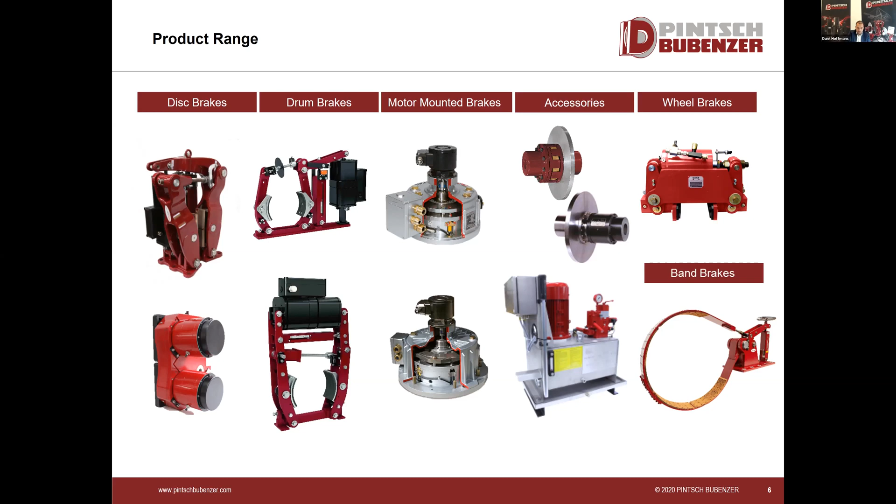Of course, we have the storm brakes, which are mounted on cranes to hook the cranes against heavy wind, to hold the cranes in position, also when they are loading or unloading. Then we have our monitoring systems on our brakes, so we can monitor each and everything on the brake, like wear, heat, speed - the complete condition of the brake itself.

Later on, we will present a little bit more about the thrusters. We have the BUEL thrusters, which is a very nice product, but Arno will present this in more detail. Then we have the rotary actuators, used mainly on spreaders, the flippers on the side of the spreaders to move them. Then we have the Cobra system, for a cable reel system to put the cable into the quay itself. And then we have hydraulic systems like the trim list and skew systems, which we supply to several crane manufacturers around the world.

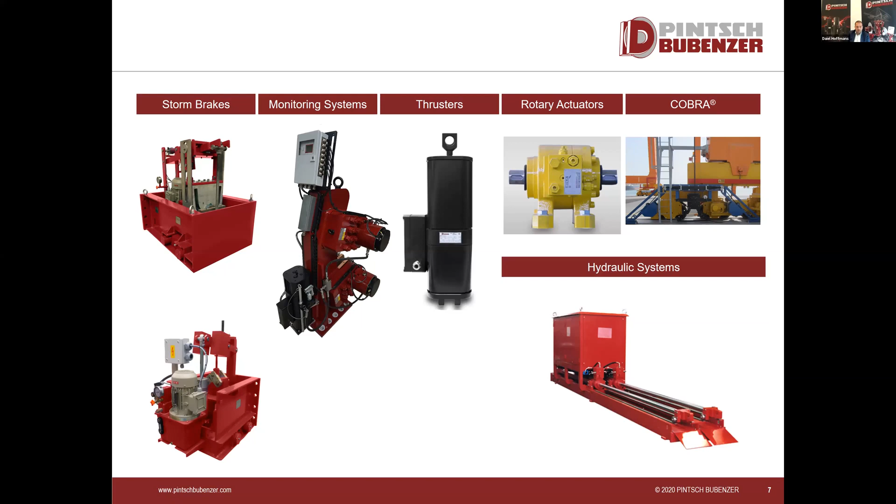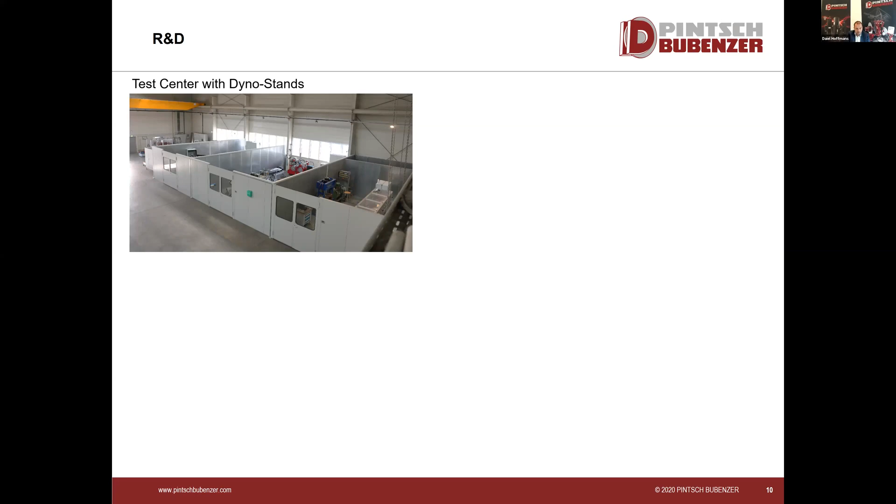Then we come to our Research and Development Center. It's quite huge, and we use it to test our brakes in different kinds of test modes. We also test the brake linings to ensure they perform well in a dynamic way and in a static way. We are very proud of this, and we have the biggest center in Europe, or in Germany at least.

So here you see the Dyno Stand. It's a test bench where we can simulate the speed of the disc and a certain moment of inertia on the disc itself. We can brake it in a dynamic situation, but also test the brakes in a static way using hydraulic cylinders to push the disc brake around and see the reaction. So every brake we put into the market has been tested quite well.

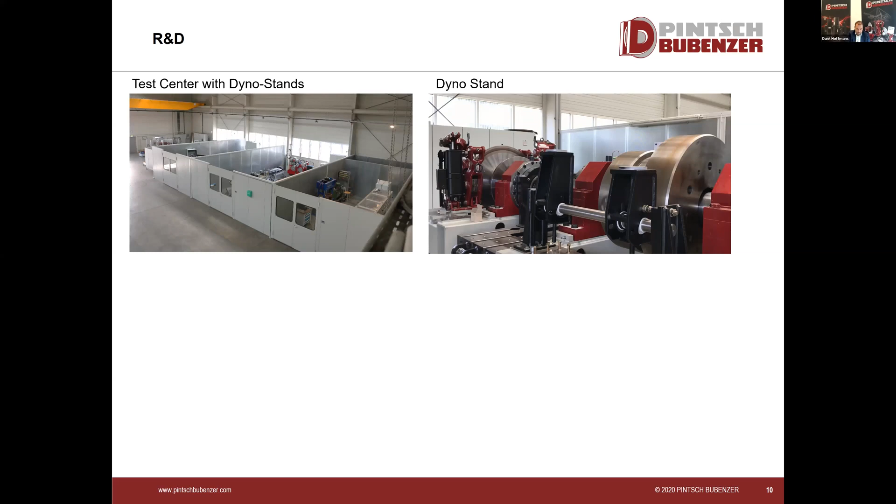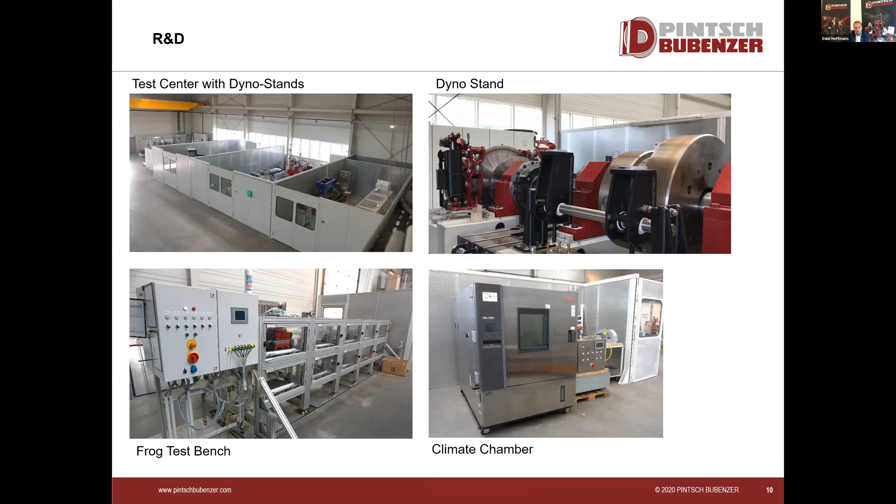We can also test our brakes in the frog test bench, mainly for the windmill brakes, but that's also an opportunity we have. We can also use our climate chamber test area, but again, the dyno test is one of the most valuable things we use for our testing at the moment.

Just to give you a little idea, I have a small movie of one test we are doing, and it's quite impressive.

This is a test we are doing on our SB28 brake point 3, and here we see what kind of test we have done with a certain speed. We can measure the temperature, the wear, and also the friction coefficients of the brake itself in a dynamic way.

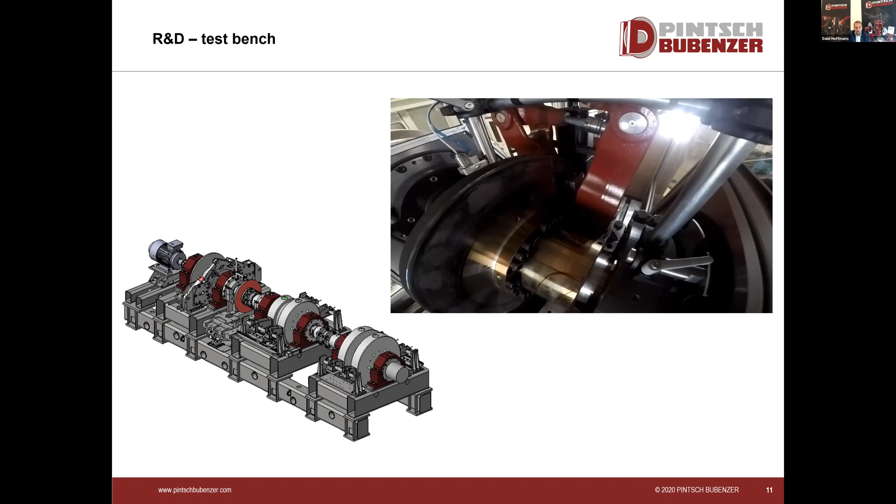So mentioning this, we are a fully equipped company with the test center we have, ensuring our brakes are put on the market in a good way. Pintsch Bubenzer, in this case, is a worldwide best product. We have a state-of-the-art R&D center, are customer focused, provide 24/7 service on the best level, and offer leading technology for the future.

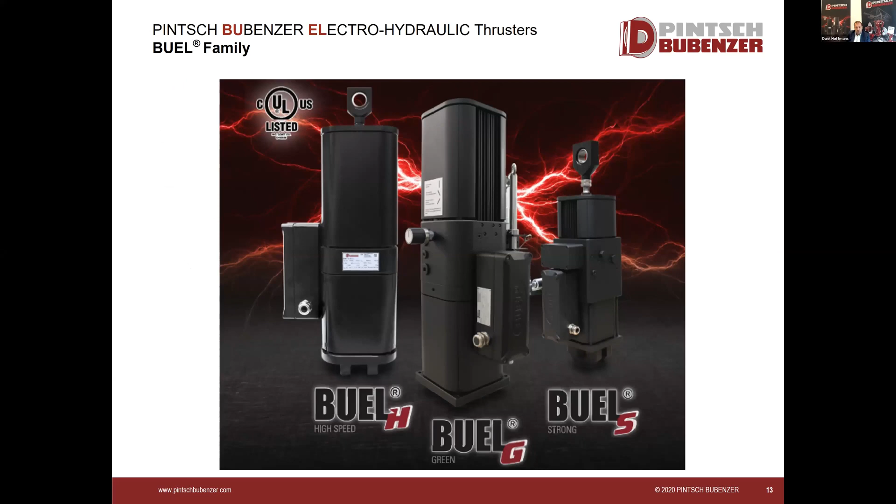Now we are coming to the next point, and that is the introduction of our BUEL family. I would like to give the word to Arno in this case.